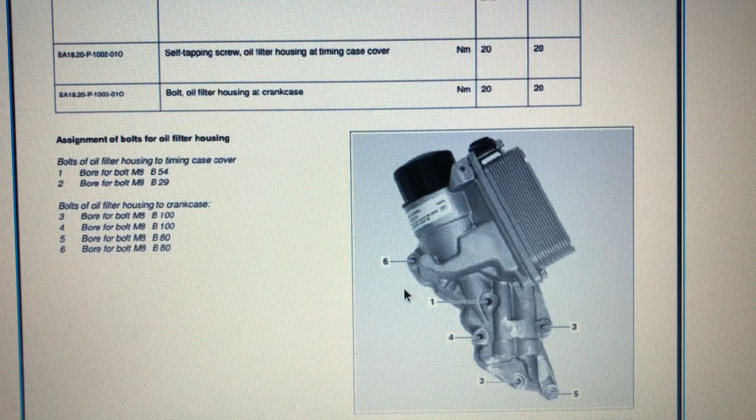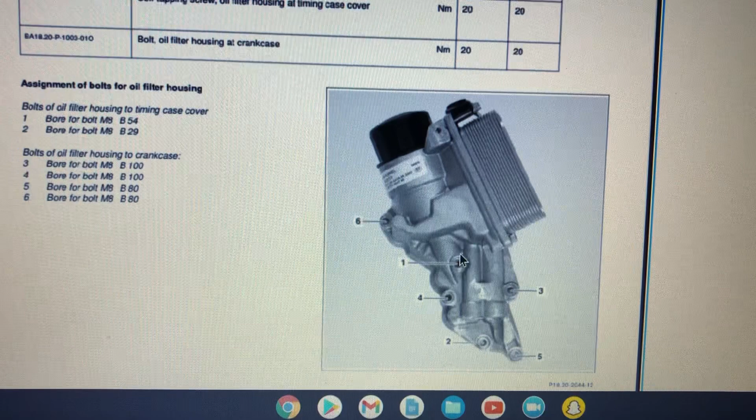In order for you to remove the oil filter housing, you're gonna have to do it in the opposite direction. It's gonna be 6, 5, 4, 3, 2, 1. Once you remove that, this is just gonna be able to come out.

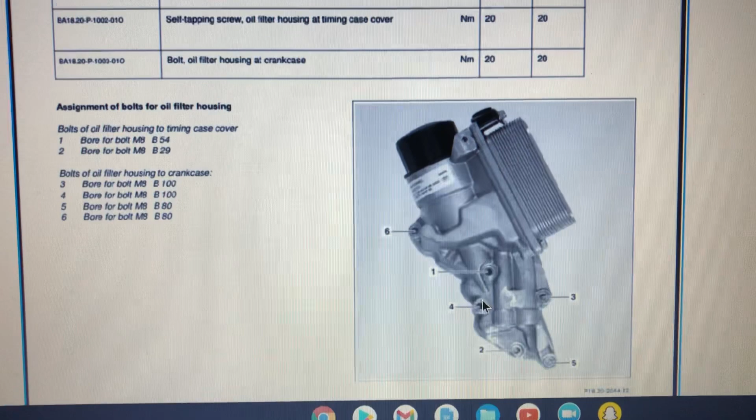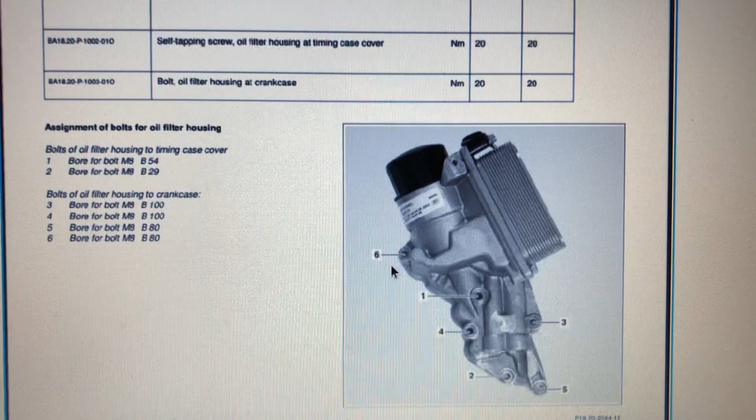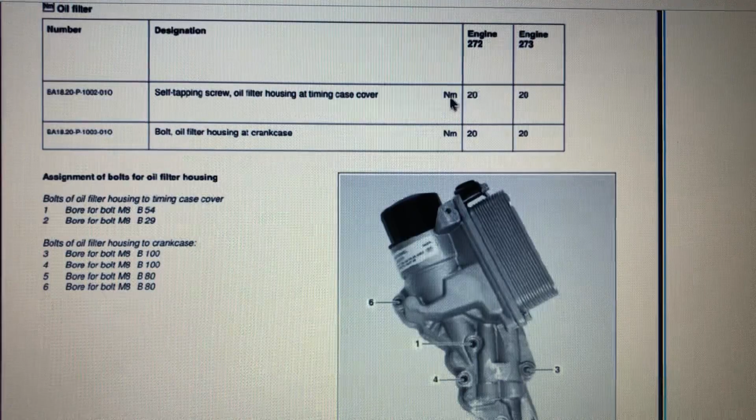Then you're gonna get the new bolts that go to the oil filter housing. Each bolt's gonna be a different size, I believe, so make sure you get it at the dealer. And then you're gonna have to put it in this order: 1, 2, 3, 4, 5, 6. Once you do that, if you have a 6-cylinder, that's going to be the M272 engine. It's going to be torqued down to 20 Newton meters. If you have a V8, it's going to be torqued down to 20 Newton meters as well. Regardless, 20 Newton meters, right?

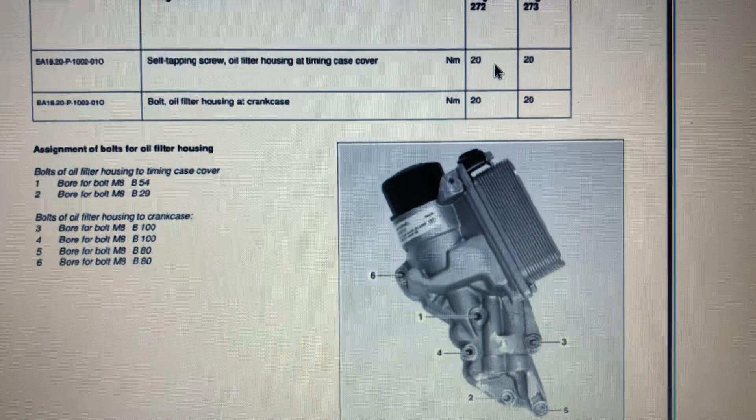Newton meters, that's different from foot pounds. So put that up on Google, and you're going to be able to see what is the difference for that.

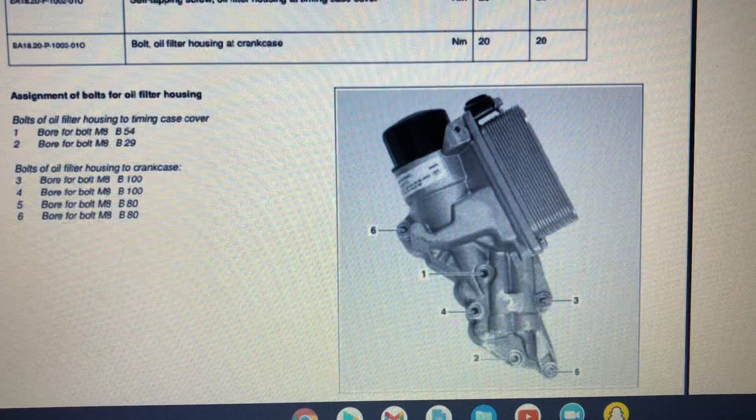Now we're going to go to the, what do you call it? Give me a second. Let me exit that. All right, good.

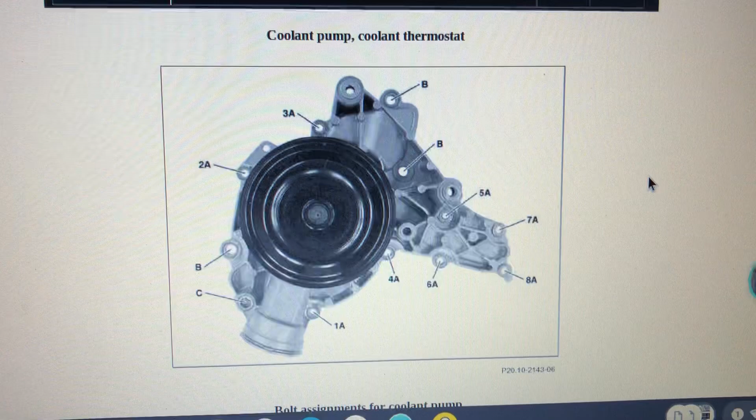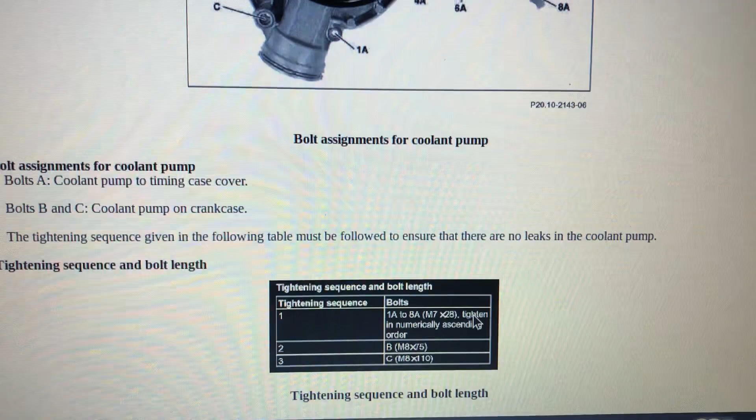All right, and now in order for you to do this, the water pump, you're going to need to buy new screws. So everything you're going to need to buy new screws. Why? Because the last thing you want to do is put the screws right back in and then they snap. You don't want that. So for the thermostat, the water pump, the oil filter housing, buy new screws.

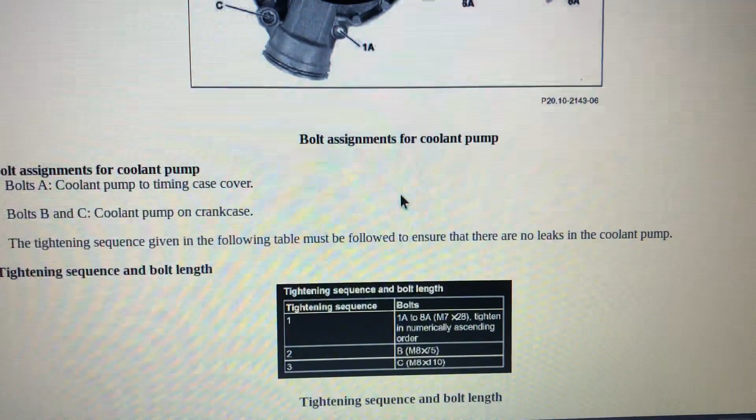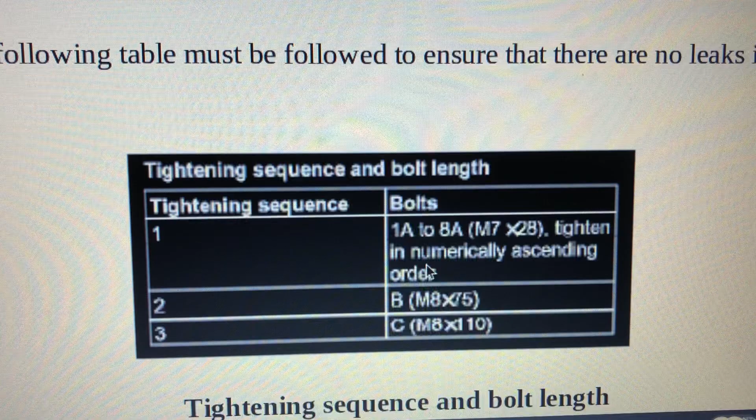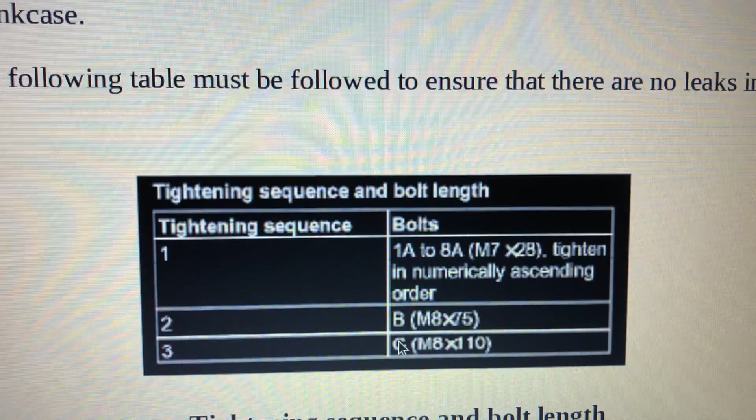So for the water pump, the screws are going to be 8 M7 X28, that's going to be 8 of them. Then you're going to need 3 M8X75 and then 1 M8X110. Let me see if I'm correct. Last thing I want to be is wrong. Let me see. 3, 4, 5, 6, 7, 8. Yeah, 8 7s. And then, yeah, 1 C.

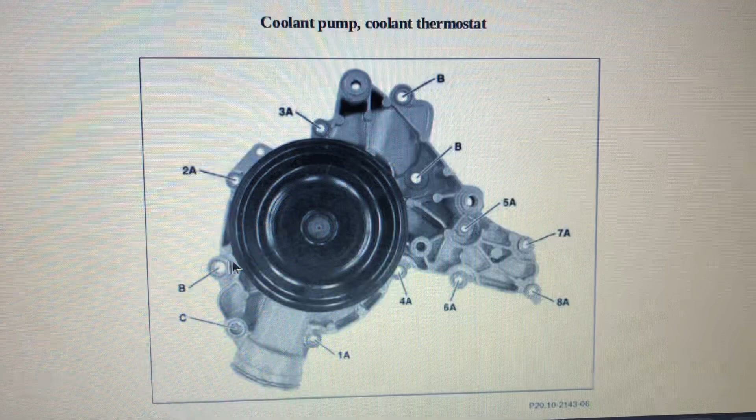All right, so in order for you to start doing this job, what I did was I removed it from the opposite direction, right? So 8, 7, 6, 5, 4, 3, 2, 1. And then the B's, you're going to have 3 B's: 1, 2, 3, the B's. I removed them in any order, that really didn't matter. And then the C, I removed the C last, right?

And then to retighten it, I did the same process, except it was 1A, 2A, 3A - 3A is right here actually - 4A, 5A, 6A, 7A, 8A, and then from the 8A, then I went to the B's: B, B, B. I did it in any order. The C's, I did it in any order. It doesn't matter.

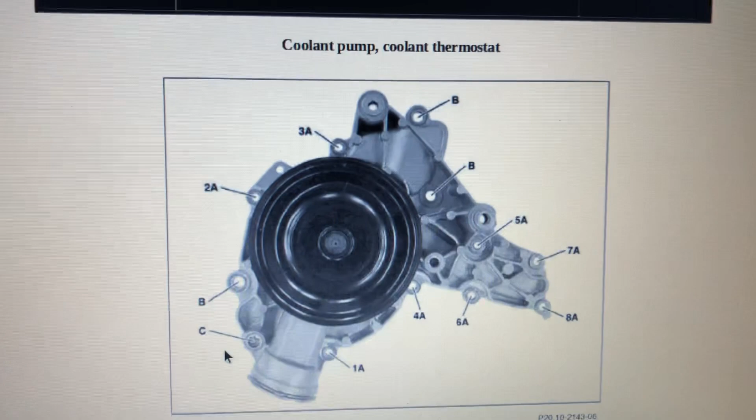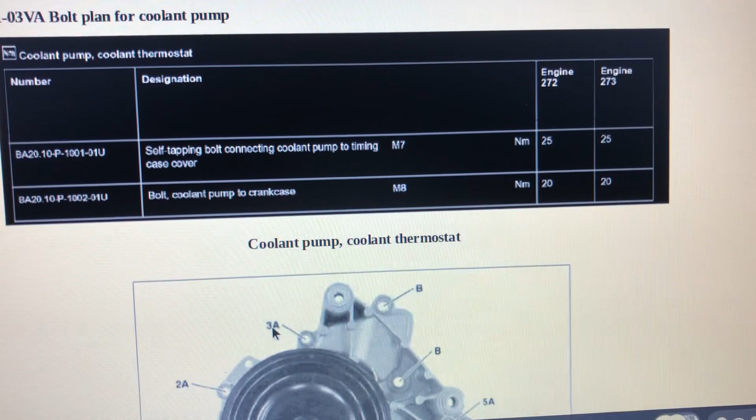But the bolts do matter, right? So the 8 A's, right? 3A right here, so you're going to have 8 A's. For the M7s, it's going to be torqued down to 25 Newton meters, right? For the M8s, it's going to be torqued down to 20 Newton meters. That's the B's, B, B, you're going to have 3 B's. And then for the C, where's the C?

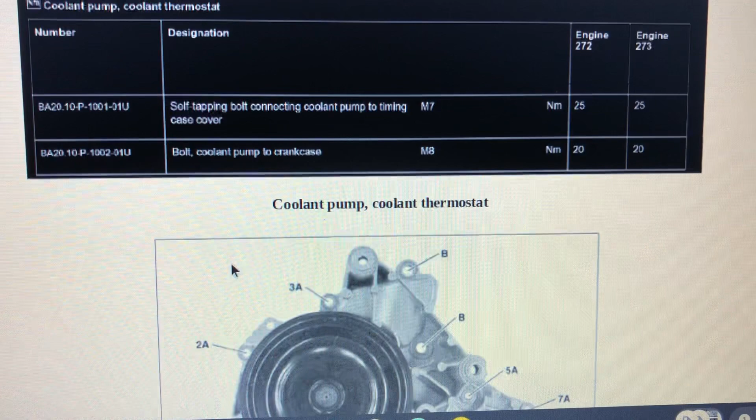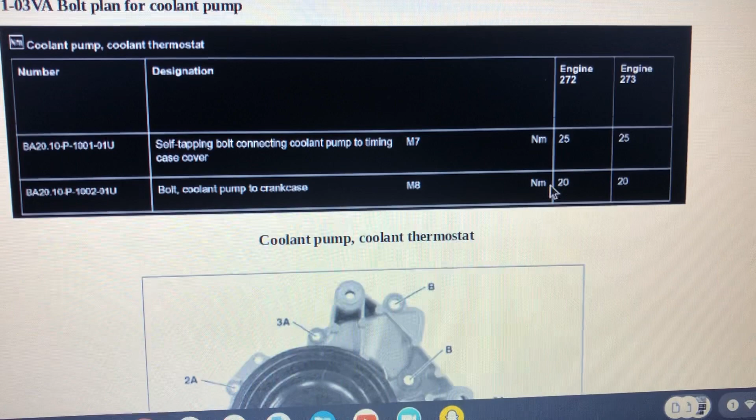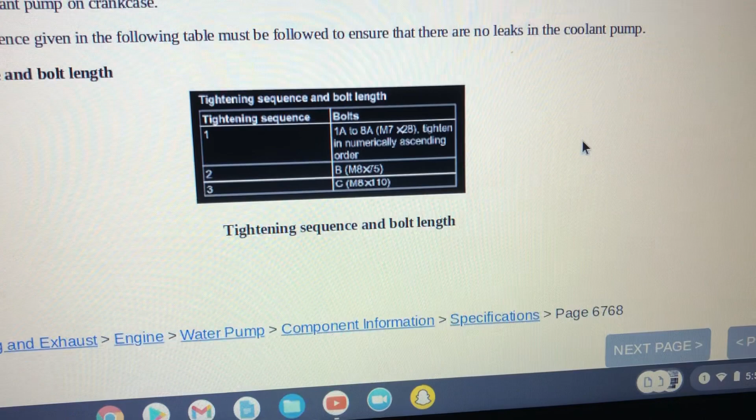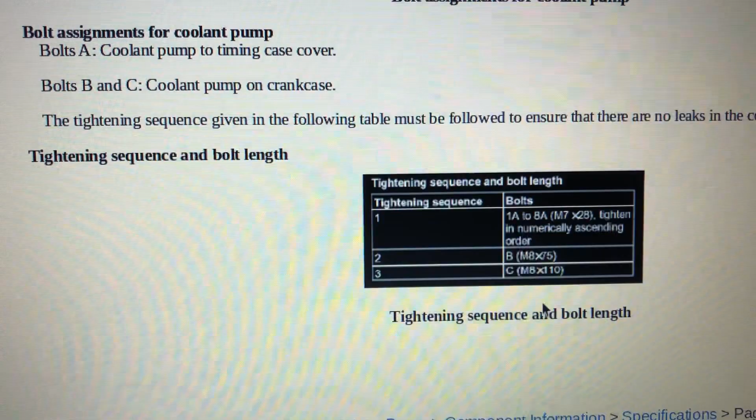All right, give me a second. All right, so M7, 25, M8, 20. Where the hell is the C? I believe the C's, I did the same thing, 20 Newton meters. That's what I believe, but let me triple check. Let me see, coolant, okay. Yeah, it's gonna be 20 as well.